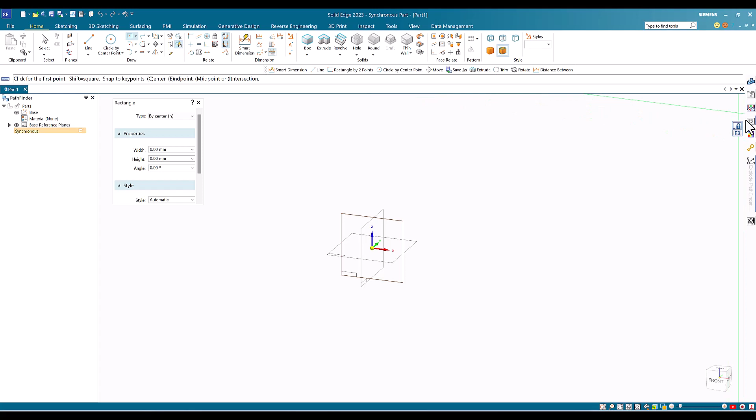And before I choose anything, once you select rectangle by center, automatically the projection will show the plane, the perpendicular planes will show. So I'm going to lock myself to the front plane. I'm going to click on F3, and once you click on F3, you see F3 in the upper right corner. This means I'm locked to the front plane. This way, if I click on the front plane on the cube, everything I'm going to draw will be on the front plane.

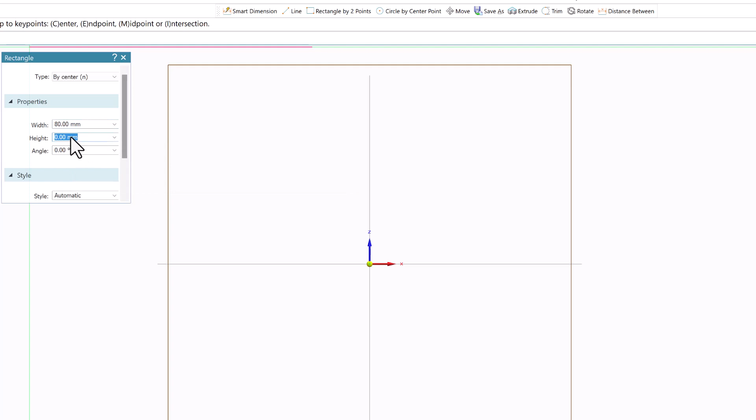So let's start with the rectangle by center. The width is 80, and the height is 10. So now I'm going to go here and exactly in the center, I'm going to click. So this means if I go to smart dimension, this will be 10 and the other one will be 80.

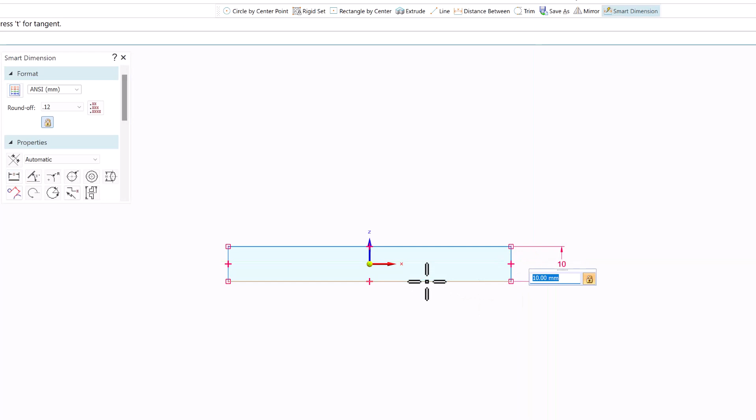The next step is, as you can see, I'm going to draw these concentric circles. So I have 25 and the bigger one is 50, 25, 50, 25, 50, and this is the location. So what I'm going to do is just start doing that.

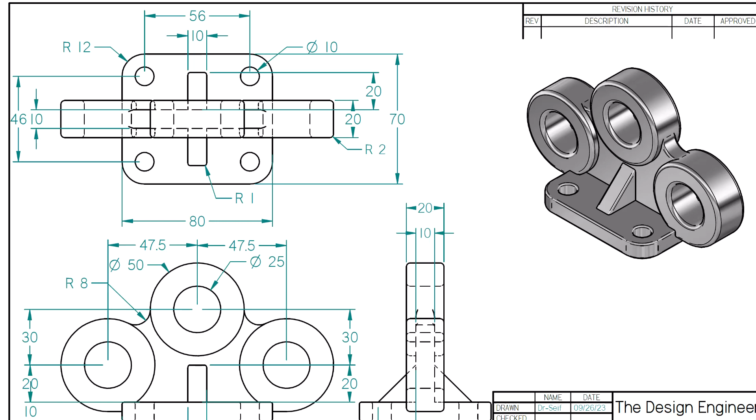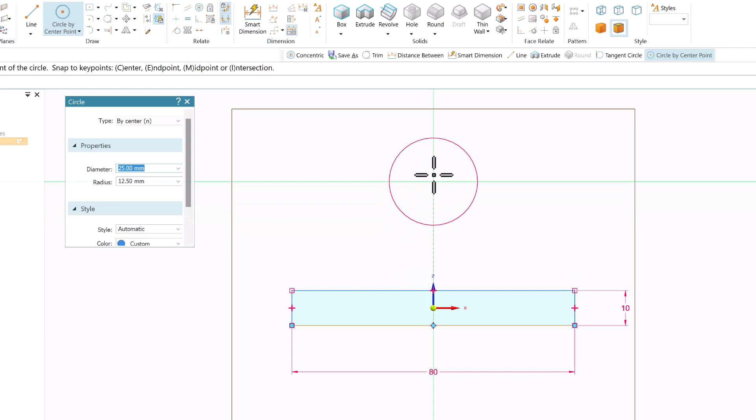I'm going to start with circle by center. The first circle is 25. And what I'm going to do is come to the center exactly, and go vertical. When I see the dashed dotted red line, I'm going to click. Also, let me get the other one here to this side. So I'm going to put it somewhere here, any location, and then we will fix it.

Now the next step is to do the circle of 50. So I'm going to put 50 and highlight the outside, the circumference. When you see concentric, you click, and when you highlight here, when you see concentric, you click.

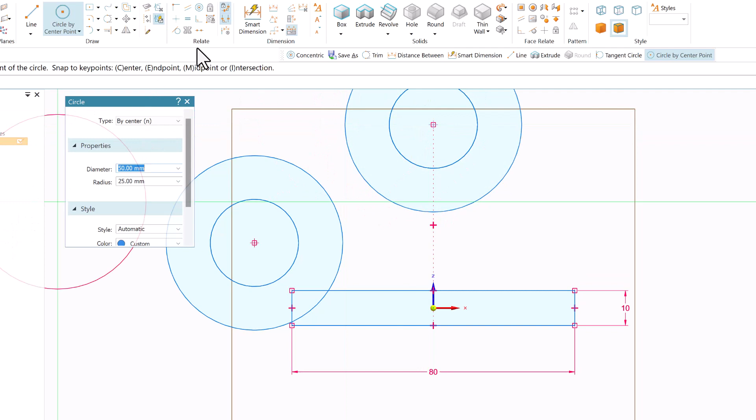Now I want to make sure that they are concentric, so I'm going to use a concentric relationship. I make the bigger one concentric with the smaller one - you can see the concentric symbol here - and the same thing for the bigger one, concentric with the smaller one. I see the concentric here.

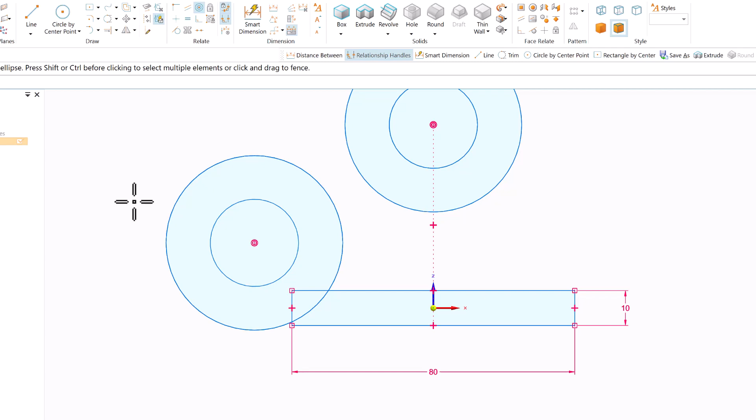The next step is to make the distance between - I'm going to use distance between, x between, and make sure that you have horizontal vertical. So I need from the center of this circle to the edge of this rectangle, this distance to be 20. So I'm going to put 20.

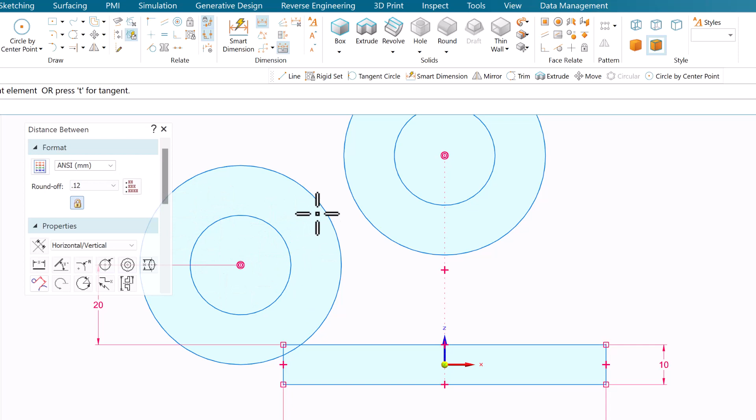See, since we did the concentric, they move together. And what I'm going to do is move also this whole thing down, because I need to fix the other locations.

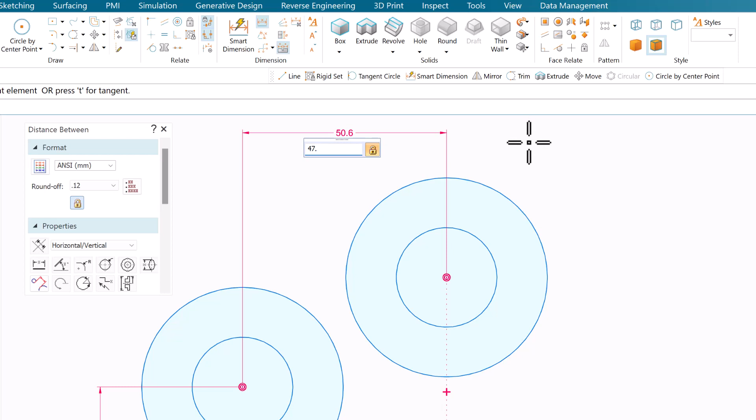Click on X dimension. From the center of the smaller circle to the other center of the circle, this should be 47.5. So I'm going to say enter. Okay, so everything moved, and this should do it.

Now I need to fix the location of these two circles here. So I'm going to use X again, from the center of the circle here to the upper surface here. This should be 50, so I'm going to put 50. And as you can see, everything moves together because you locked them. So I got the location correct.

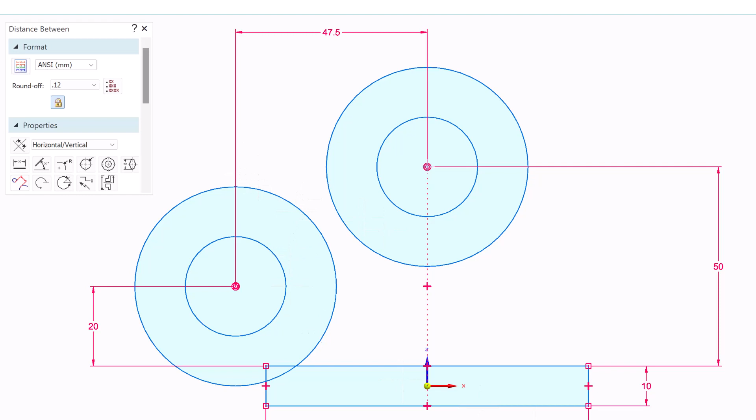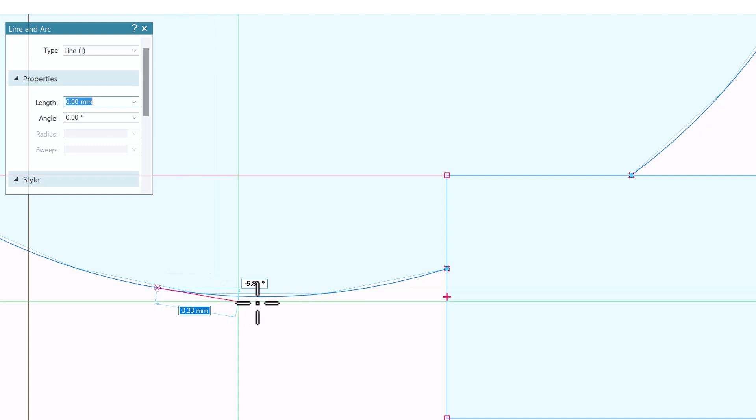Let me zoom in at this corner location so I can start cleaning. I'm going to use the trim - I need to get rid of this curve here, I need to get rid of this. I need to draw first a line tangent to this circle here and go horizontal. So I'm going to go horizontal, and when I see the horizontal symbol, I'm going to click.

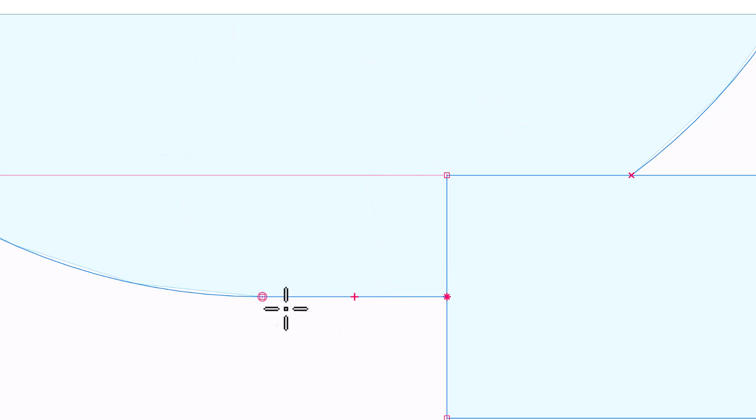Right click to get out, or escape. And then I'm going to use the trim to get rid of the extra line here, get rid of the curve here. And I'm good. So now I was able to get this, so I'm going to zoom back using the roller mouse.

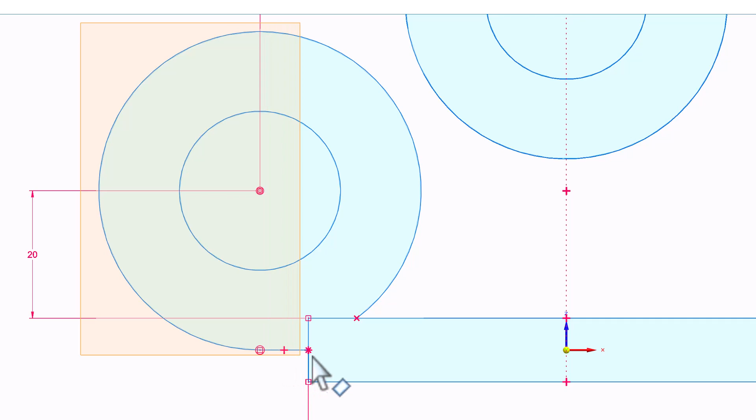So I can have this one here. Okay, so now I get this horizontal and I clean the area here. So the next step is I'm going to highlight this part here, this circle here.

And make a mirror to the other side around the z-axis. So I'm going to click on the z-axis. So I got the other side. Okay, enter.

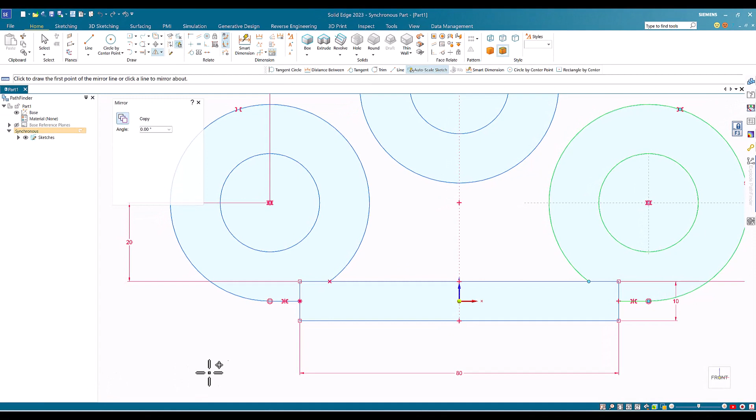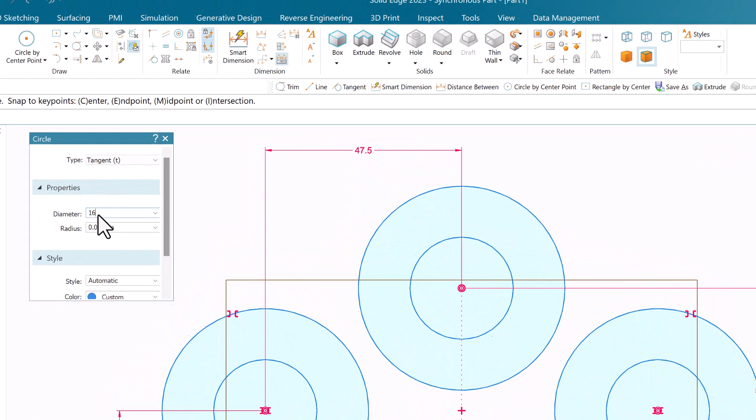So we got the main thing, and now the next step is I'm gonna just zoom together. So I'm gonna use circle, tangent circle, click on tangent circle, and the diameter is 16. Enter. And just click at any point. And then you move. When you see the tangent symbol, you click.

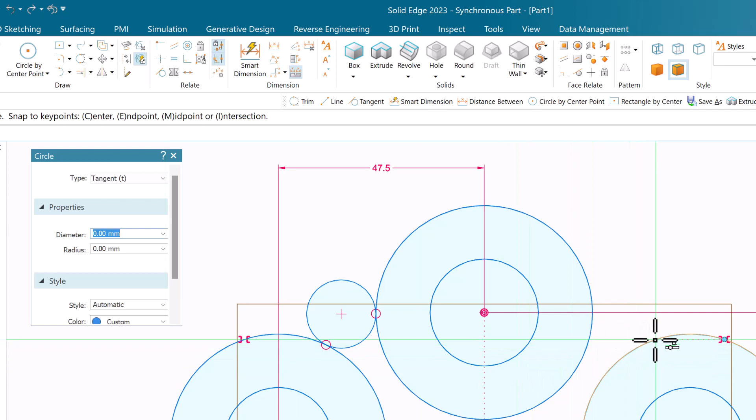That's good. I'm gonna do the same thing also on the other side. So I'm gonna click at any point and make this circle 16. Enter. And then move it very slowly to the other circle. When you see the tangent symbol, you click. So this way I have the circle 16 tangent for both sides.

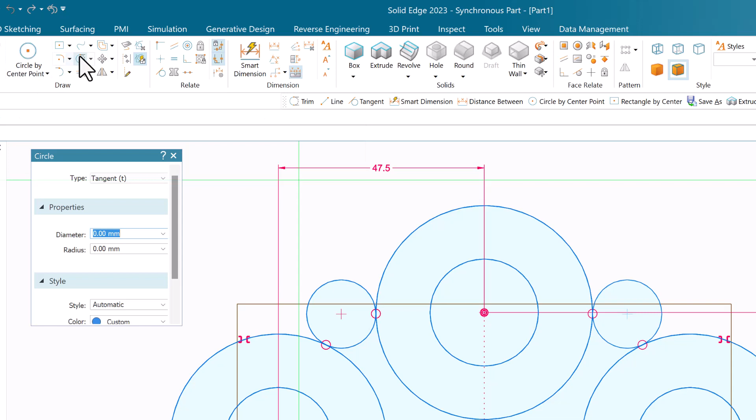So I'm going to click on the trim and get rid of this part and get rid of this part. So almost I'm done with the drawing. So what I'm going to do is I will go to home and choose select. I'm going to start doing the extrusion.

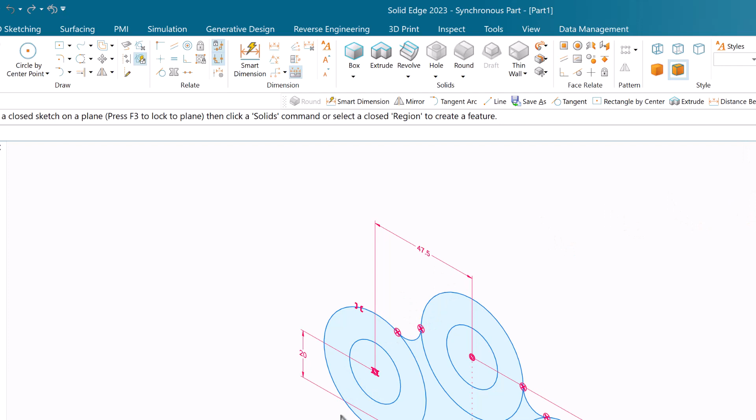So I'm going to click on this rectangle and I need symmetric. So I'm going to highlight symmetry and click on any arrow. It doesn't matter because it's going to be symmetric anyway. And then make the extrusion 70.

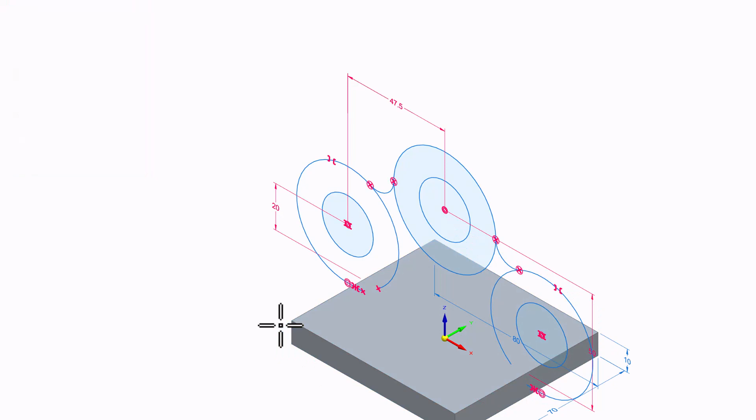So I got the extrusion. Notice something here. The sketch disappeared and the bluish color here disappeared. So I wouldn't be able to do any extrusion after that. So I have to bring back this sketch.

How do you bring it back? You highlight, expand, Used Sketches, click on the sketch you used, right click, and say restore. So you're gonna restore the sketch. Once I restore the sketch, everything becomes bluish, so I can extrude it.

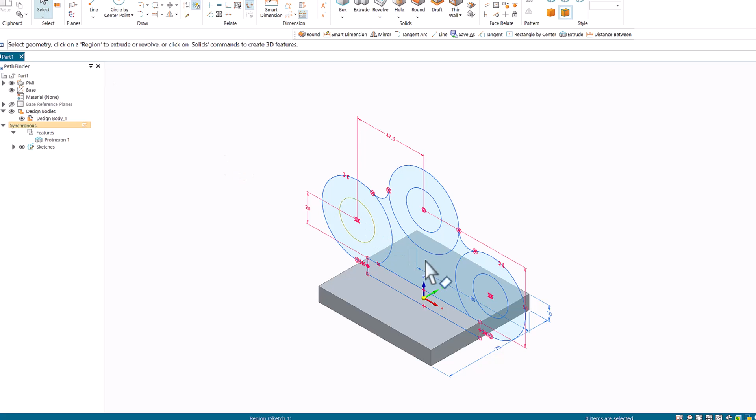Okay, after that, the next step, I'm gonna extrude the inside. So it is select again. So click here. It is symmetry. Everything should be the same. So then I'm gonna make this one 10. So 10.

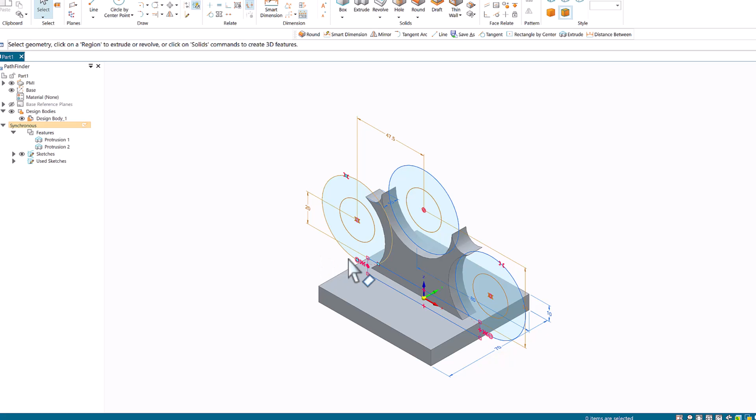The next step is I'm gonna make the extrusion of the cylinders here, the 3 cylinders, and to do the 3 cylinders at the same time, since they have the same thickness and height, what I'm gonna do is hold my finger on the shift key and then go to the mouse between the two circles, click, and click on the other one, and click on the other one. Once I finish with all the three, I'm gonna remove my finger from the shift key and then click on the arrow.

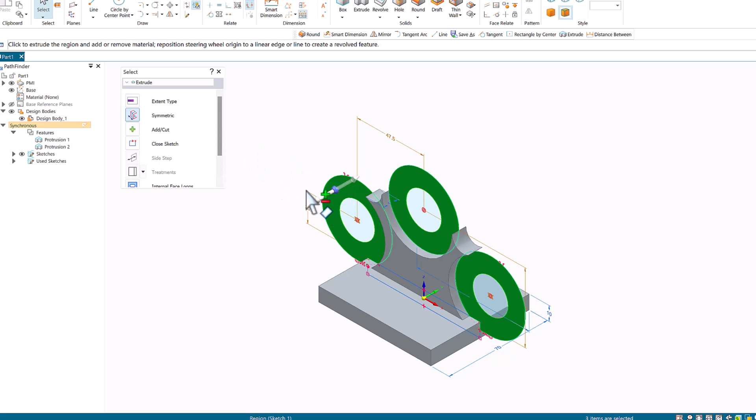Make sure that it is symmetry and plus. So I'm gonna click on the arrow, doesn't matter which arrow, and I'm gonna put 20. Enter. So this way, did I put in 20 or how many? Doesn't look like 20 to me. So let me see what it is.

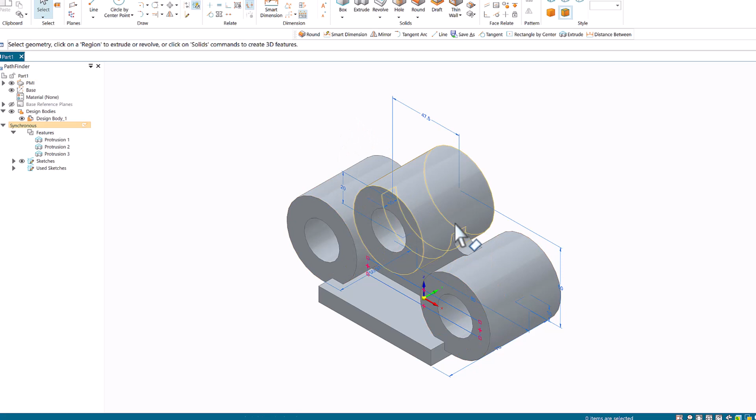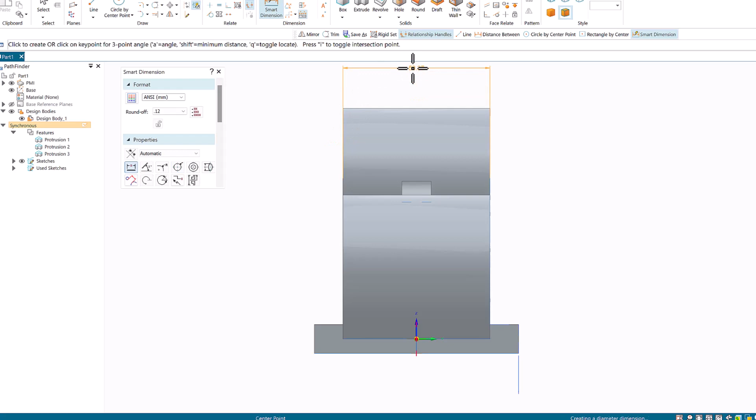Let me go to the right, and see how big this one is. So let me get the dimension. Let me go to this edge, to this edge. Oh, it should be 20. And both sides, I'm gonna click on both dimensions. Okay, so now both of them, all of them become 20 now.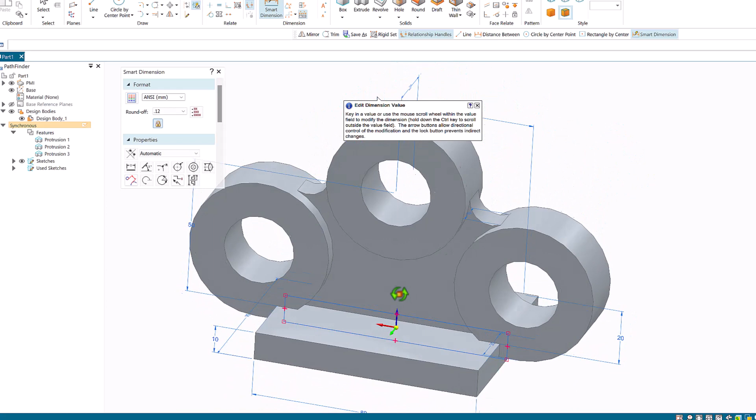Okay, any questions? Okay, so now once I'm done with that, I'm gonna start doing some cleaning. So I'm gonna click on the round. Okay, and what I wanna do is I wanna do this round here. I needed 2 millimeter. Enter.

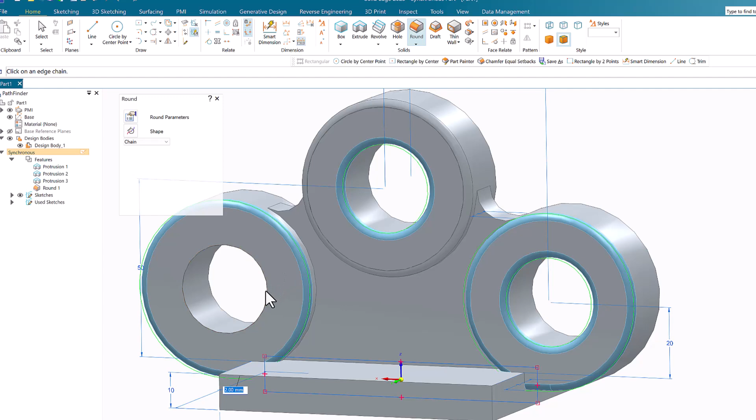2. And the same thing for the other one here, and the other one here, and the inside, and the other inside, and the other inside. Then I will go to the other side and do the same thing, round again. Click on this one, click on this one, click on this one, and click on this one, click on this one, and click on the other one. So I was able to do the thing.

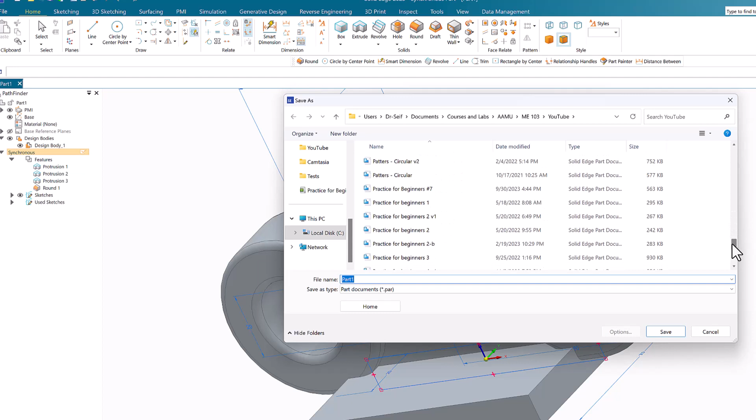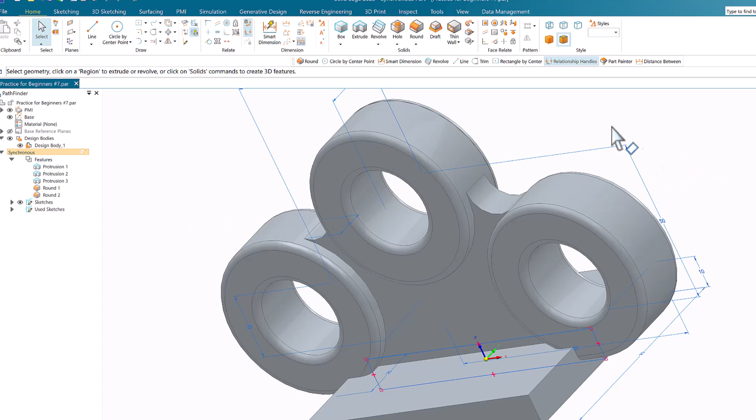Practice, here it is, practice for beginners. Okay, we have another one, so we're gonna save. You're gonna ask me why I'm doing saving. Because I'm gonna let you know what's gonna happen if I didn't do that, especially if you have a laptop or computer with low memory, so you need to keep saving.

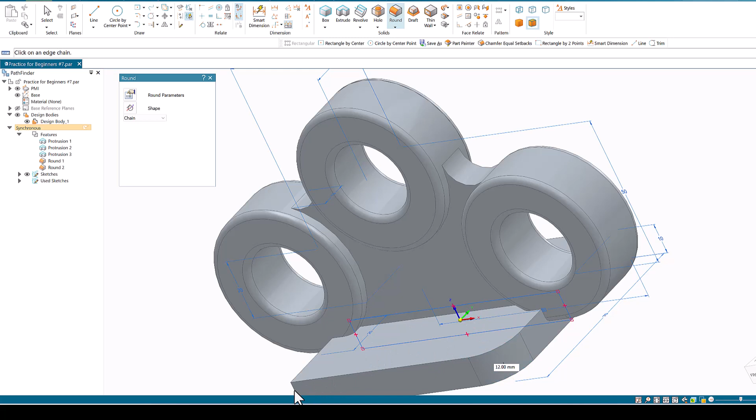Once you are done with a part and it's done right, go ahead and save it. The next step, I need to round the edge here. I'm going to click on the edge, and instead of 2, I need it 12. Enter, and click on the other edge also. Make it fit. Click also on the edge here. Good. Then I'm going to rotate it, do the edge here, click, and the other edge here, click. So I was able to get these rounds.

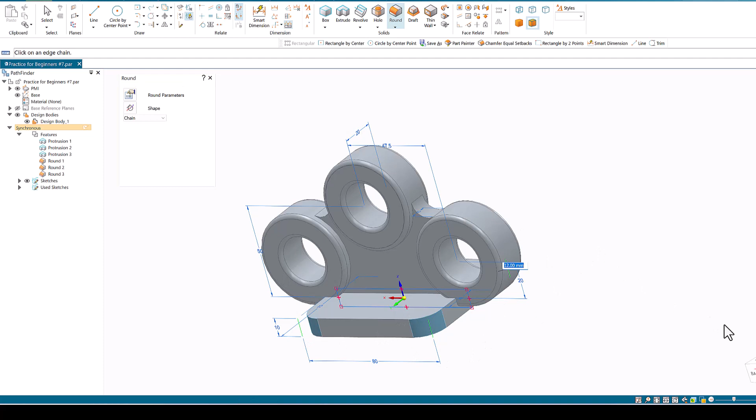I'm going to look at the top and get a circle by center, and this circle by center is 10. Enter. I'm gonna come to the surface here, click on F3, so I'm locked to this surface, and go to the center of the curve here, and click. So now I put it in there.

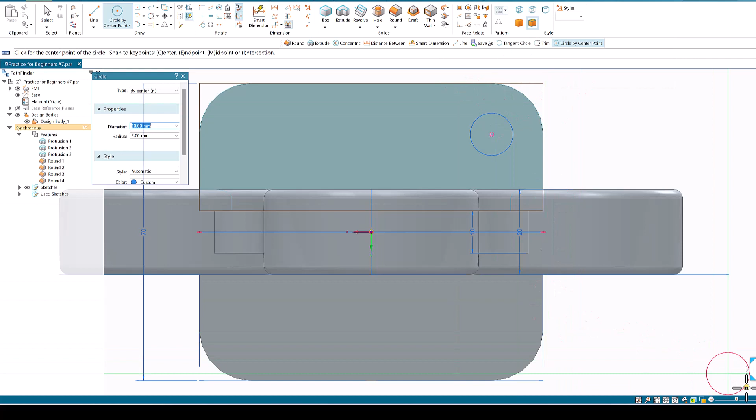Now what I'm gonna do is actually do the 4 circles, the 4 holes, using the rectangular pattern. So let me go back to home and do the extrusion. I can do it by select or by extrusion, it's up to you, whatever you prefer.

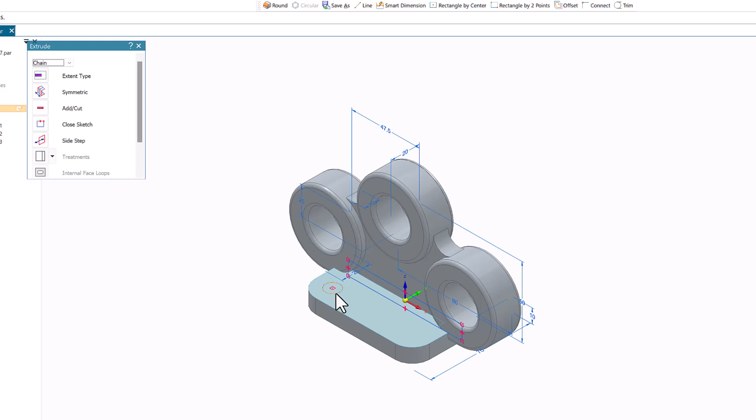So I need this one to be negative, cut, you don't need symmetry. I'm gonna come to this, instead of face, I'm gonna use this, either chain or single, chain is fine. So I'm gonna click on, okay here it is, click down. So once I pass through the thickness, I will click. So I got the hole.

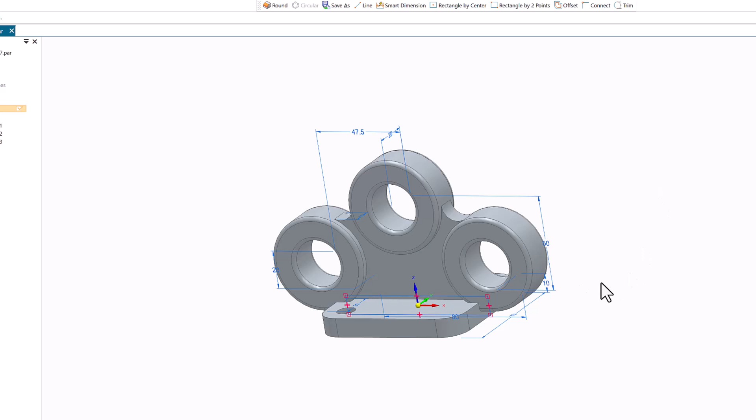Then the next step, I'm gonna do the curve, the sharp edge, make it smooth by round. But this time I'm gonna make the round is what? Let me go closer. Okay that's good. So the round, and I'm gonna click on the edge here, and instead I need it 1. Okay, it gives me an error because 12 is too much.

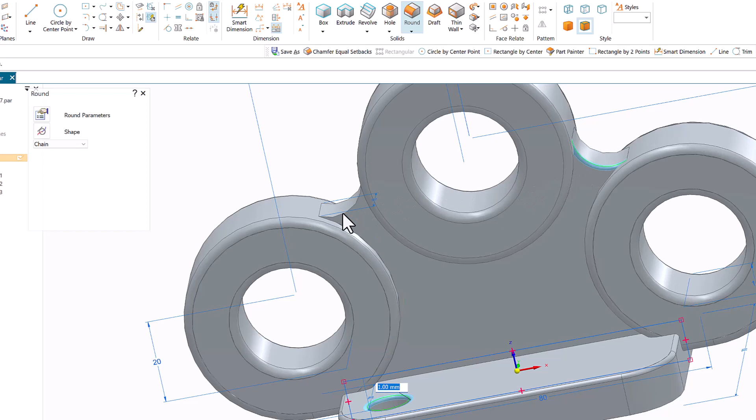Okay, so I was able to do this one, so do the other one inside. Then I'm gonna move to the other side. Let me do the top here first, and the other top here, and the other top here, the other side. So the top here, and the top here, and the edge here, and the bottom edge too. I'm gonna do this bottom edge. Very good. And the bottom here.

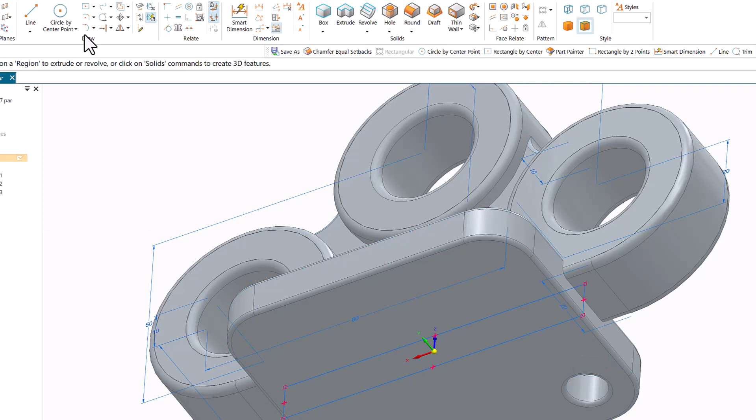Before I forget, I'm gonna save. I'm gonna click on save. So this way I saved everything now. Okay, so now we are ready for the next step, which is to make the 4 holes.

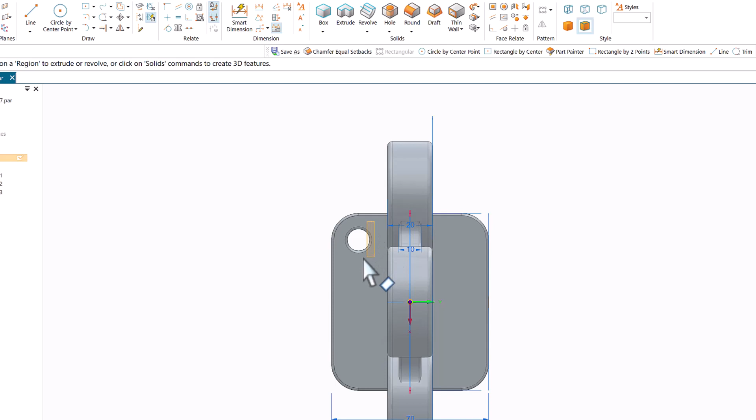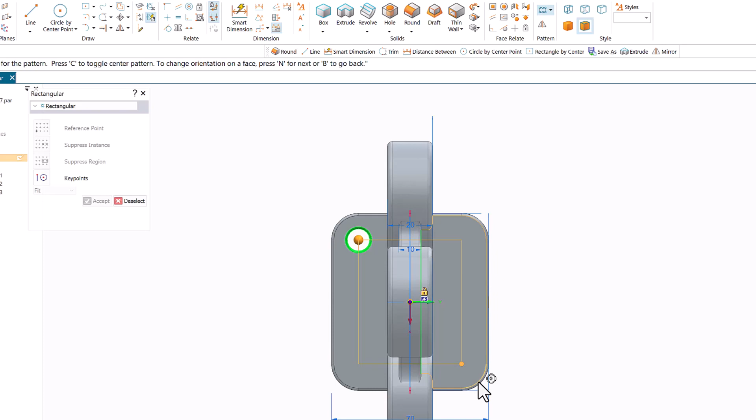So what I'm gonna do is go to the top plane. So I have it. Now I'm gonna select, highlight this hole here, and it came out. Once I have it this way, I'm gonna go to rectangle pattern. Click on rectangle pattern, and come here slowly, and see the pattern coming from the center. When I click on the edge here, once I see it is concentric with the center of the curve, I'm gonna click. Okay, it gives me a pattern.

And the number is, I needed 2 by 2, so 2 horizontal and 2 vertical. Although it did the drawing like 2 by 3, because that was a default, if the computer suggested something for you, you don't have to follow whatever suggestion from the computer. So I'm going to say accept.

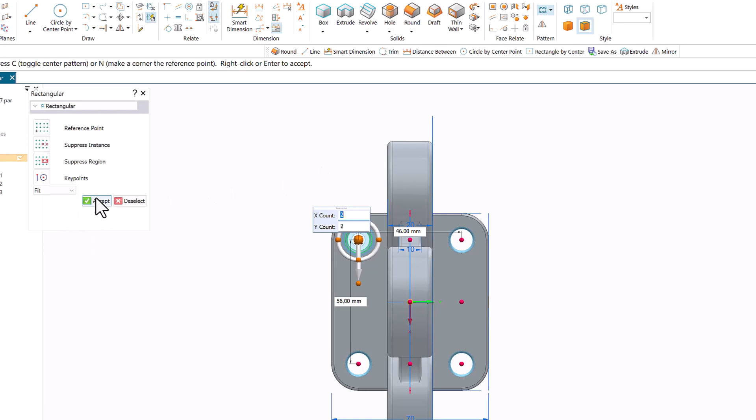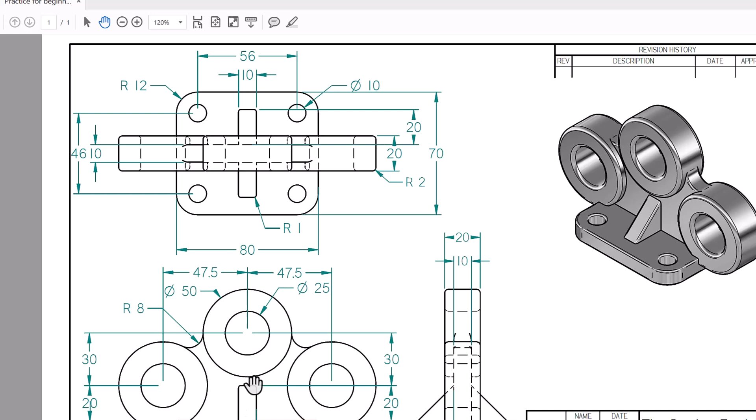So now I was able to do the 4 holes, and what's left now is to do the rib. If you go back here to the drawing, I need to do this rib here, and this rib is 20 thickness, 10, the height is 20, and the width is 20 also.

So what I'm going to do is go to Solid Edge and start the rib. How to start the rib? I didn't escape from here. Okay, so now how to start the rib? What I'm going to do is just reveal back.

I'm going to expand the base, the reference plane, and make the right side plane visible. Okay, so now I have the right plane visible. I'm going to use a line to draw the rib. So what do I need to lock myself to? To the right plane. So I'm going to right side plane.

So I'm going to click on F3. This means that anything I'm going to draw, you see F3 to the upper right corner, is going to be in this plane. Now what I can do is just go to the center here from this line here, whatever.

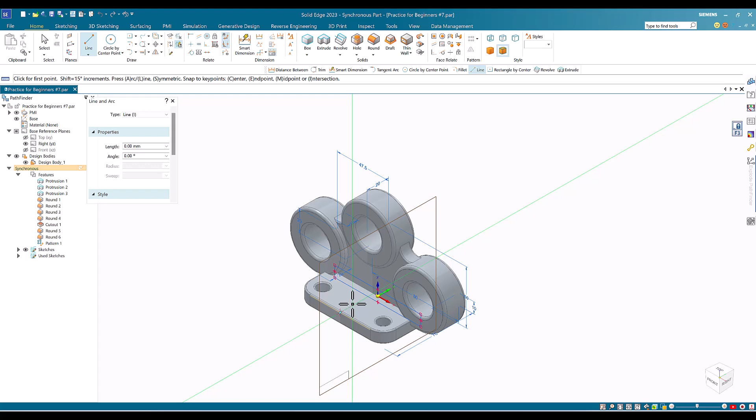I see the dotted red line, so I'm going to click, and when I see the other one here, I'm going to click. Okay, now we'll see. Right click to get out. So I made sure that it is drawn in the plane. You see, it is drawn on the plane.

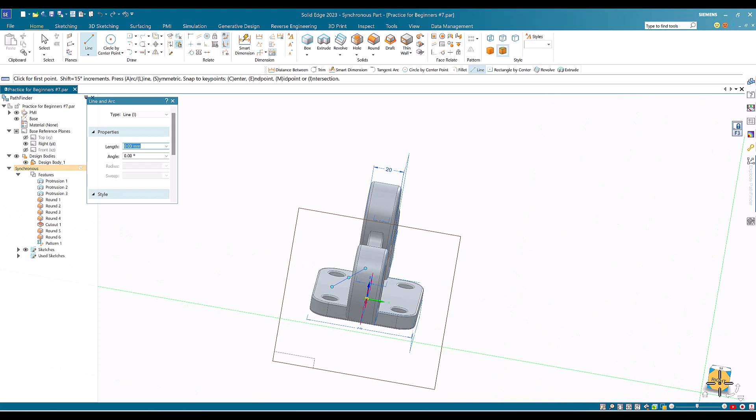But now I need to fix the dimension. So what I'm going to do is go to distance between X and get the tip of the line here to the bottom of the line here. And I need this one to be 20. So I'm going to put 20.

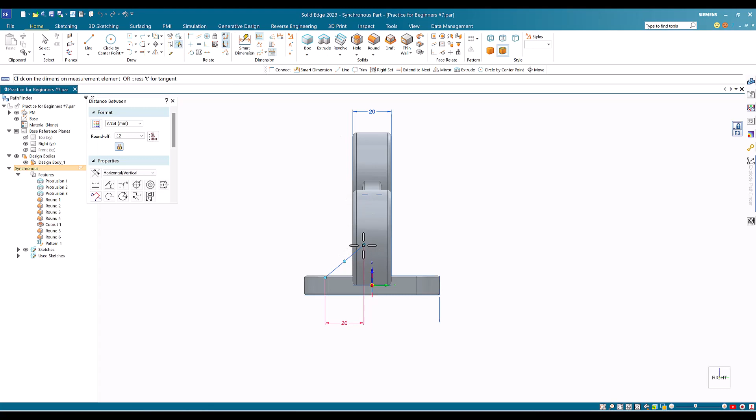Auto scale sketches. Okay, now I need to do the same thing with the other dimension. I'm going to go here from this edge here. I'm going to get the X dimension from the tip here to the tip here. I need it from here. This should be 20, so I'm going to put 20.

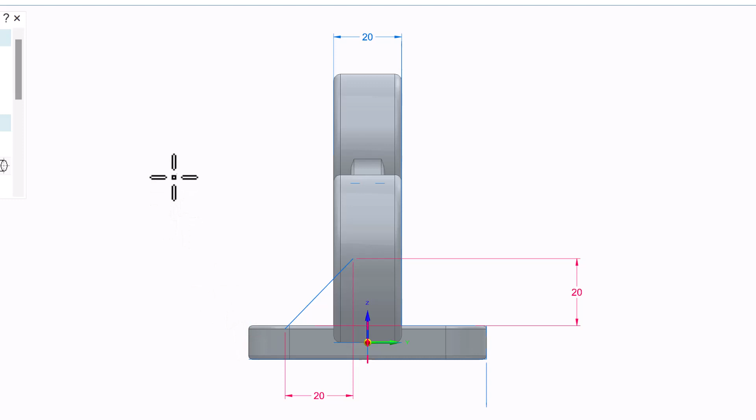So now let me see how. Oh, so this is 20, this is 20. So what I can do now is the mirror.

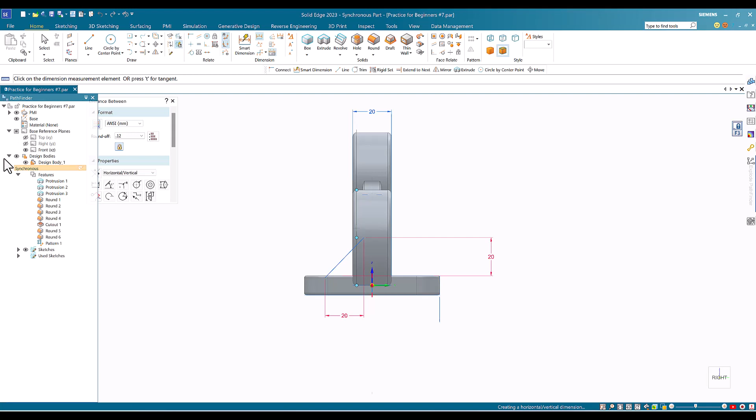So what I'm going to do is highlight and hide now the right plane. I don't need the right plane anymore. So I'm going to hide this one and get the front plane. Have the front plane on, because I need to draw the line to the other side.

So what I'm going to do is select this line and make it mirror. Let me get rid of this lock, the F3 lock. Then go back here, click on this line and select this line, a mirror, and I need the mirror of this line around this plane.

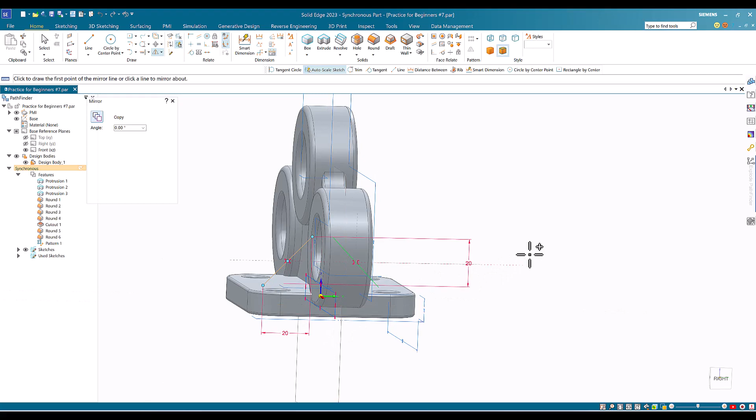Okay, so now if you look carefully, you see that it is there. Now let me go back here to these two lines, and I'm going to highlight, go to thin wall. Under thin wall, get rid of this one. Let me escape first.

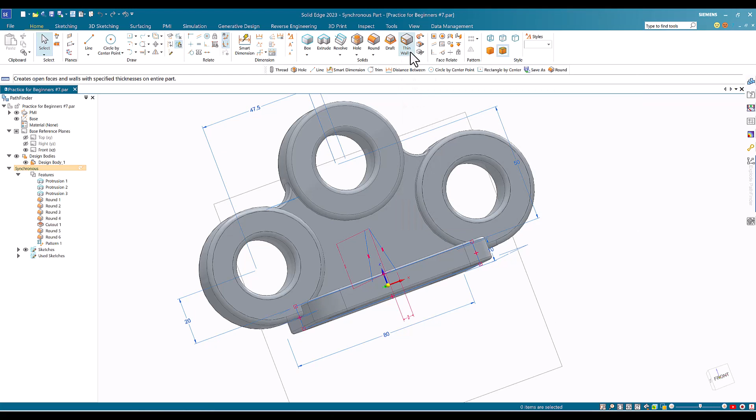Okay, get to under thin wall, I believe. So yeah, under thin wall you get rib. Click on the rib, highlight the line, and accept. This should be 10. It is 10. Okay, so now we got this one.

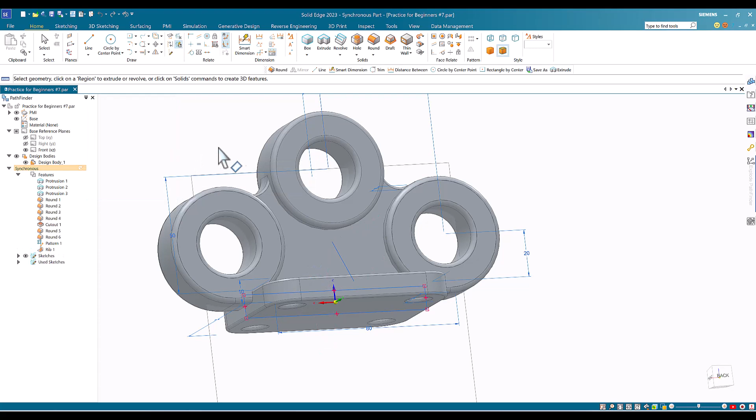And let me do the other one too. Accept. Okay, this accepted, yes. Okay, now let's go to the other side. So thin wall, rib, highlight the line, accept. Okay, it is 10, yeah, okay.

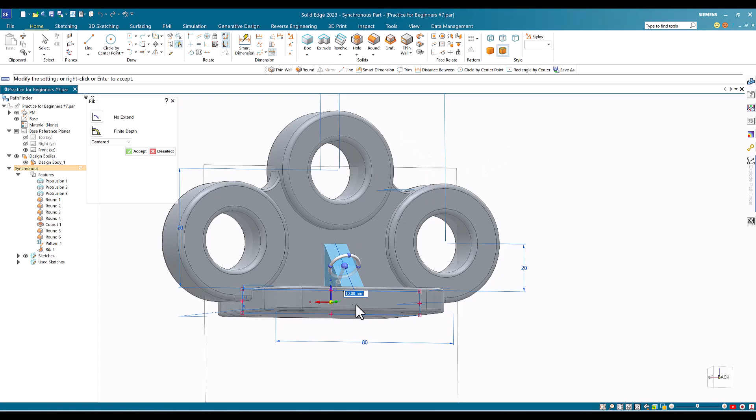The thickness is 10. Okay, so let's accept. Accept, accept. That's it. Okay, so I was able to do all the drawing the way it should be. But let me go to home here, and I want to make sure that everything is fine.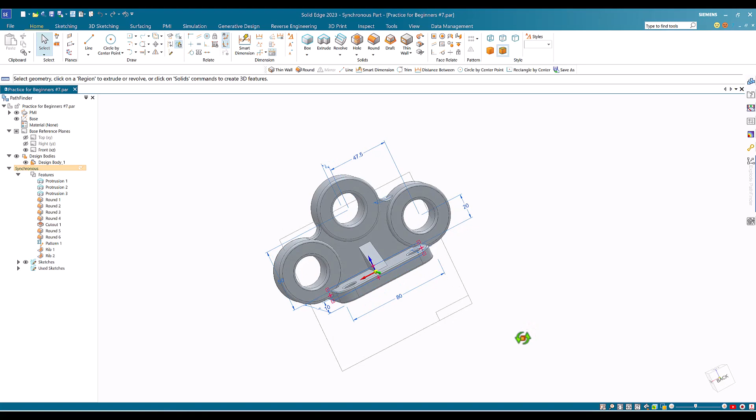The only thing left now is to do the edges for the two ribs. So what we're going to do is say round, click on this edge and the other edge. So I'm done with these two, and then I go to the other side and round again, click on this edge and this edge. Okay, so as you can see, it is done.

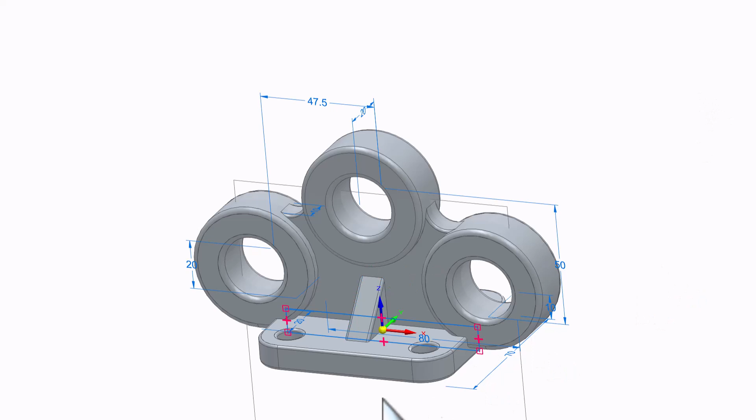This will end our video for this part, and I hope that you like it.